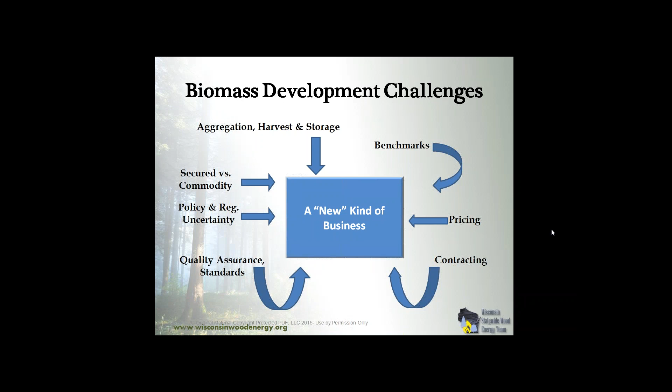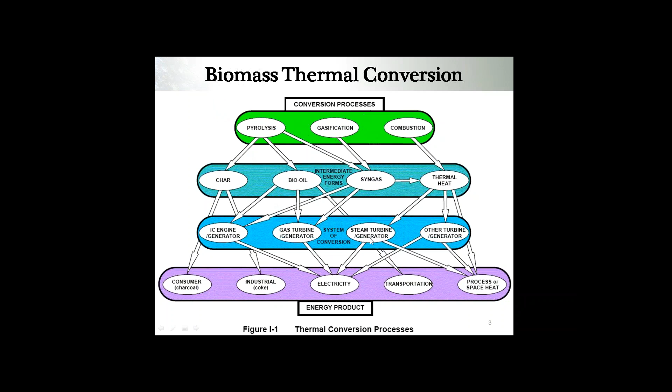The next series of slides are examples and exhibits on various types of conversion processes. For today's purposes, although I'll talk about some of these others, what we're really going to focus on is the steam turbine generator for the production of electricity and process and space heat. There are many other types of applications, but for today's purposes we're going to focus on those platforms.

It's not too much of a stretch to see some of the rationale for doing so. The thermal efficiency, when you do a combined heat and power plant, can be boosted anywhere between 20% to almost 40%.

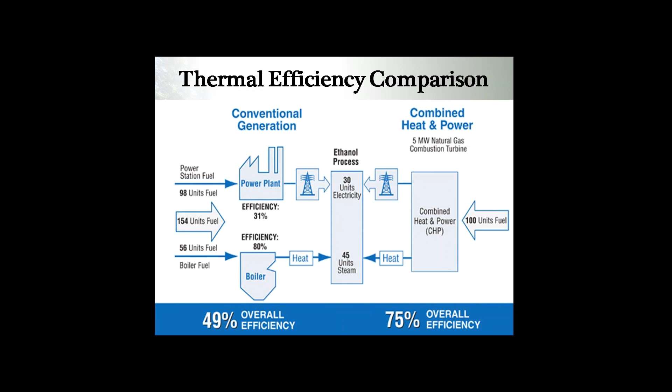The more common CHP systems are boiler-based, though there are emerging turbine-based systems. But in the United States, and particularly in the Wisconsin setting, almost all of our systems are boiler-based.

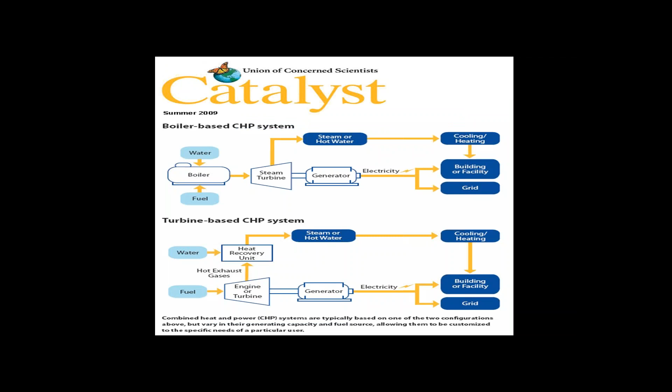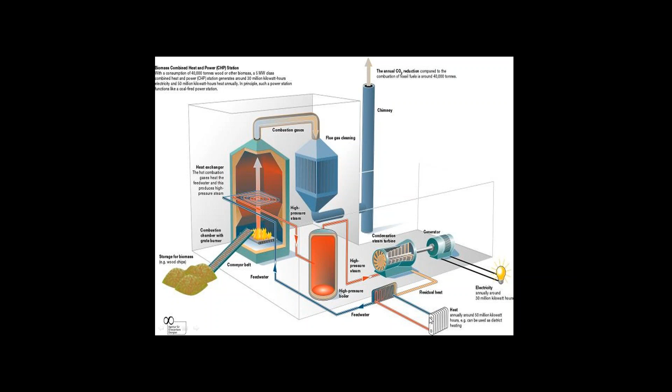These systems are not rocket science in terms of degree of complexity. You've got a fuel source, combustion chamber, flue gas cleaning. Often there's a secondary combustion chamber, boiler, and a turbine. It's a very standard approach to any kind of solid fuel-based electrical generation. The real key is in the thermal recovery of these systems, as exhibited by the heat register here.

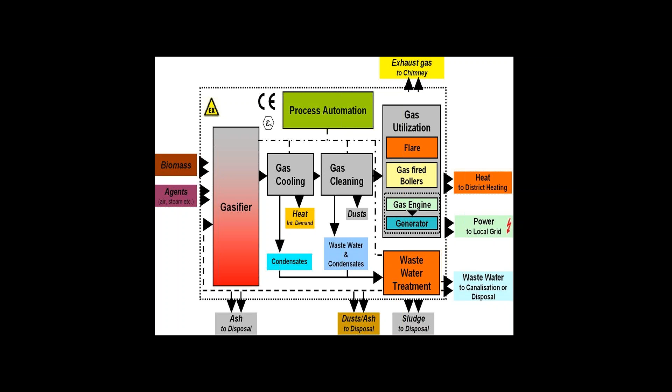Gasification, compared to a combustion boiler system, is typically more robust in that you can use various types of biomass feedstock and fuels, but it can also be a platform for doing something more than just heat and power. There are emerging platforms in gasification being looked at by increasing numbers of audiences for production of things besides power and process heat—in particular, pyrolysis and gasification systems for producing chemicals and fuels.

One other area of interest for large-scale systems is combining biomass or solid fuels with biogas. These are being investigated primarily by public sector institutions with large and predictable thermal loads. One benefit of combining these two fuel types is that biogas tends to be a consistent fuel the boiler likes to see day in and day out, whereas biomass can have a high degree of variability in fuel quality.

One day the fuel may be C&D debris with very little moisture content and very low ash, and the next day it may be forestry residuals with high moisture and high ash content. By blending in biogas, the boiler system gains flexibility—the biogas helps make up for the problems in the solid fuels.

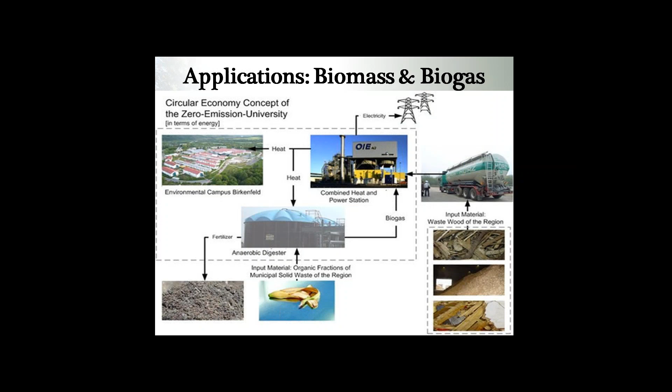I throw this slide in because this is what happens when you get a bunch of academics and agency people together in a room—they can create some rather elegant applications.

I don't mean to poo-poo this, but in terms of project financing and development in this space, today we're going to cover a pretty simple platform: combined heat and power. That said, interest in Europe, Asia, and the United States in this kind of systems-thinking, using biomass as the principal feedstock, is beginning to take hold, with projects in Brazil, Southeast Asia, and Europe adopting this approach to squeeze the most value out of a technology platform as possible.

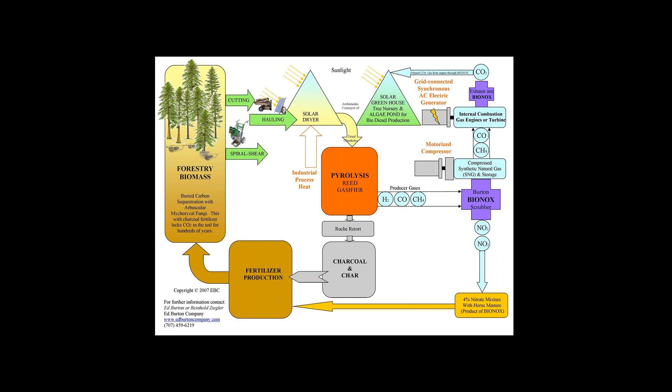In Wisconsin, Xcel's Bayfront facility is the longest operating biomass facility in the state.

It's a 73 megawatt steam turbine plant. Used to be a coal combustion system, but in the most recent years it's primarily burning biomass. The biomass is secured, purchased from a number of different logging organizations in and around the Ashland area.

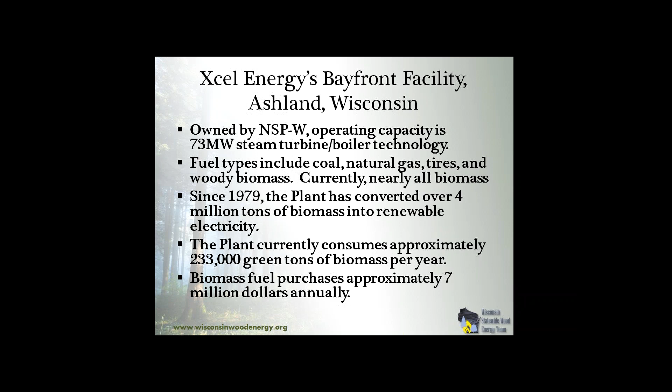It purchases north of 233,000 green tons of biomass a year, but that won't necessarily just be forestry residuals, it'll also be C&D. Xcel has a long history of purchasing in this area, and ironically, all the purchasing is handled out of their Denver office, but is delivered locally.

Domtar, on the other hand, and the We Energy facility in Rothschild is the newest large-scale biomass facility in Wisconsin. It is a CHP, thermal offtake, goes for process heat, mostly in the way of steam, to the Domtar paper mill, and then We Energy puts the balance, so what's available after that, on the grid.

It began operations in 2013. It's a 50 megawatt cogeneration plant. CapEx was almost $270 million, and it consumes about 500,000 tons of wood and paper processing residuals a year.

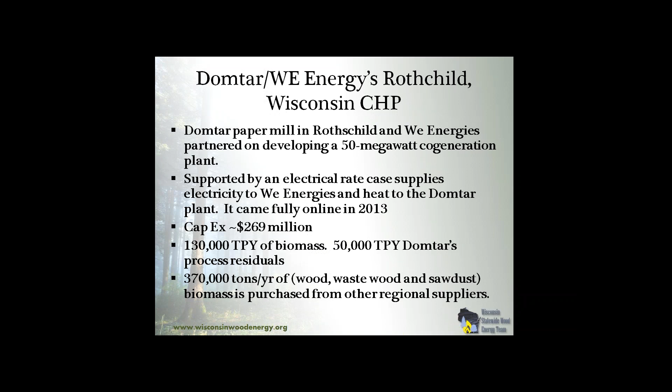Stoneman is a retrofitted plant. It's owned by DTE. It's located in Cassville, Wisconsin, which is on the Mississippi, not too far from Dubuque, just north of Dubuque. It used to be a coal facility. DTE cut out the bottom of the boiler and put in a fluidized bed.

It's a 40 megawatt plant, sells all the power to Dairyland through a PPA, and consumes approximately 300,000 bone-dry tons per year. Now that number will vary because there's a fair amount of railroad ties and C&D fuel, but DTE also contracts with foresters in and around the southwestern Wisconsin region for its biomass fuel.

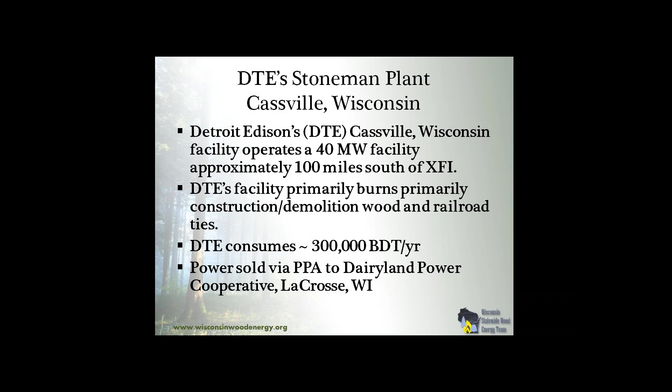All right, we're going to shift gears and talk about process, about building a business for biomass CHP. I'm going to throw a lot of information at you, but I wanted to give you an appreciation and an overview of what's all involved in building a business around a power plant, of varying sizes. The examples I'll use today will range from as large as 50 down to 15 megawatts.

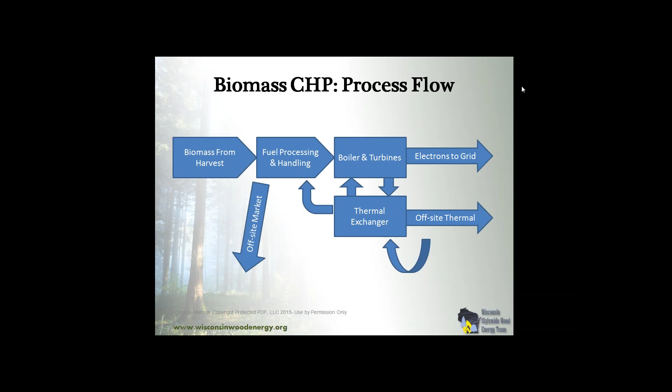It's a pretty standard process flow. Biomass from harvest goes through fuel processing. If there's an off-site market for the fuel processing, great, it goes for the boilers and turbines, electrons to the grid, and there's a thermal exchange. Let's look at this first sector.

Biomass fuel and the supply chain is by far and away the aspect of any biomass power or biomass heat project that has the most amount of risk, and as such needs to be almost bulletproof in its development. Every biomass fuel supply will reflect the regional characteristics. It will reflect what's available versus what's potential, and those are two different numbers. What the opportunity costs are for the players, whether there is an opportunity to provide fuel to a facility, where does it go to bedding, where does it go to mulch, etc.

There are the collection, harvest, and storage. Transport is the guts of the supply chain. Environmental and sustainability issues are always of everybody's concern, because if you think of it in these terms, if you are entering into a supply agreement with a facility that's expected to last 10, 20, 30 years, that supply chain has to match the demand presented by the power plant. So exploiting a biomass shed in the short term, leaving you exposed in the long term, isn't necessarily the best strategy.

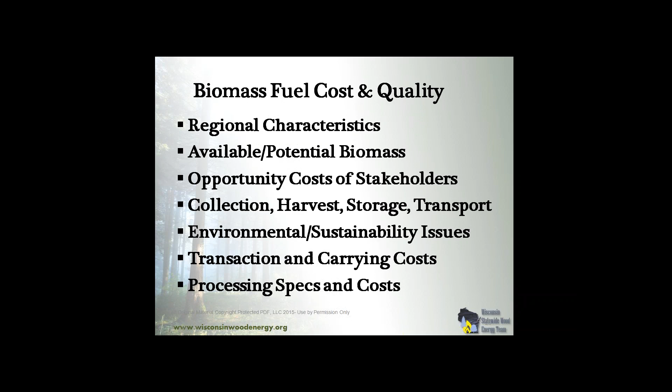Transaction and carrying costs for the inventory have to be built into this, as well as the processing specs and the costs to the converter themselves.

There are many different functions and roles in the supply chain: the broker, the dealer, or the person who puts the deal together, whether that be strictly a buy or actually a project developer; the producer of the biomass themselves, the harvester, the collector, those who transport, store, and take care of the logistics, who processes the fuel, and is there a business or financial service provider.

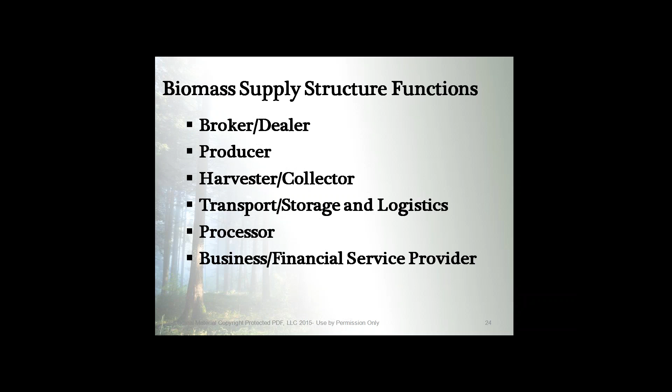In some cases, all of these functions can be provided by one or by a group of companies or participants in the supply chain that perform all these functions. In the case of Bayfront, that's pretty common, in that they're securing the stumpage, they're producing the wood, they're collecting it, they're transporting it, they're shipping it, and they're acting as the business agent.

Various types of supply structures exist. What is most common, and the examples I gave earlier, is vertical integration. What that means is that the converter, the power plant, actually owns and finances or operates a large degree of the supply chain.

In other cases, it's outsourced, where bids are solicited, and it's up to the producer, harvester, or collector to perform the functions in the supply chain. How it's managed, though, has historically been internal. That is, the power plant operator receives their supply delivered as is, and then bears the burden of dealing with the feedstock or blend internally with their own equipment and personnel.

What this system is competing against from fossil hydrocarbons is much more complicated, because with natural gas or coal, you place an order and expect that feedstock mix to be managed by the vendor or supplier. The vendor's paid by meeting specific characteristics of feedstock, whether it be Powder River Basin coal or natural gas, but it's expected there be consistent quality. We're not seeing that approach in the biomass space quite yet.

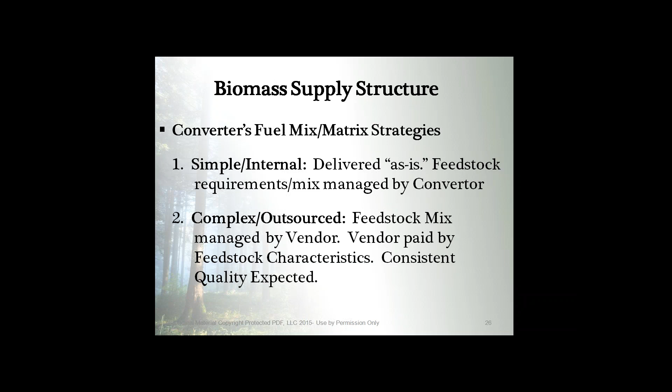There will be inroads as densification facilities play a larger role in feeding conversion platforms, where you can expect consistency. You can envision companies like Mark Wood Products and Indec and others starting to fulfill that role and then gaining the confidence of the converters that they're capable of doing so.

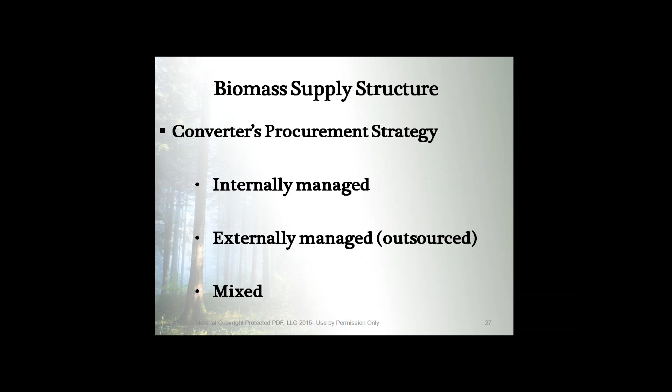Let's look at this a little better, because it's important to understand, if you're the supplier, how the converter thinks. In this case, when it's internally managed, the converter staff and systems are managing the fuel. This requires the converter to maintain a lot of staff.

For instance, in DTE's case, they were brokering over 1 billion tons of coal a year to various power plants, and that entire system was managed by 2 people. In their biomass supply, they've got maybe 4 or 5 plants, dealing with less than 1 million tons a year of biomass supply, but yet they had 6 people internally dealing with that.

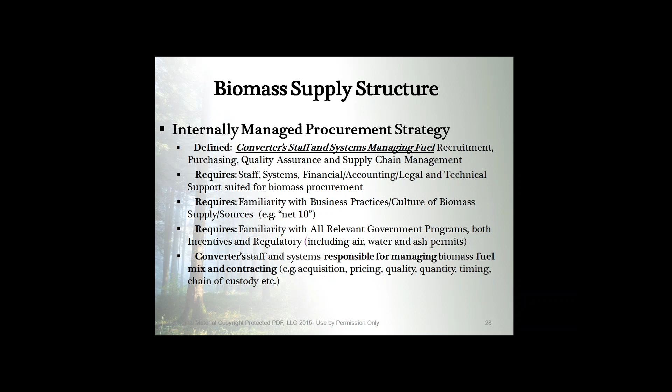It requires a commitment by the converter. If that commitment, that trust, can be extended outside, then the vendor is required to provide the staff and systems, but they're closer to the fuel itself and perhaps better suited to do so.

The defined fuel recruitment, everything is contracted outside of the firm. And then the converter staff, that is the power plant, are responsible primarily for managing the relationship with the biomass supplier. This is more in line with the coal situation. This is the ideal, so to speak, for biomass suppliers, but we're not quite there yet.

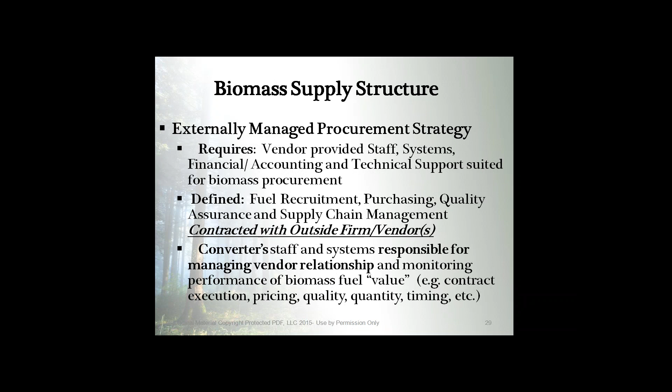I do see the pendulum starting to shift eventually. In those cases, you're going to start to see a mix, where a certain amount will still be dealt with by the converter, and then they'll start identifying players in their supply chain who they deem creditworthy and provide them more of an opportunity to provide turnkey services.

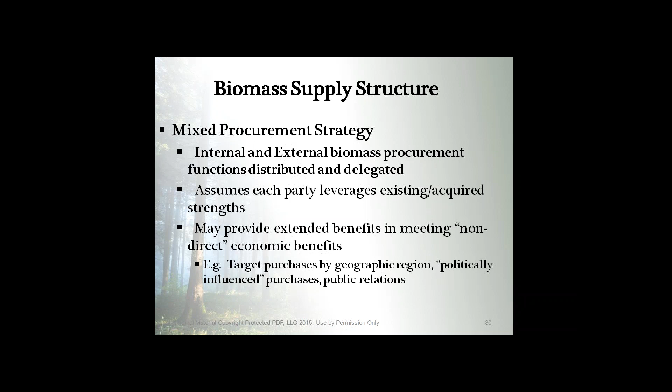All right, so let's go back to the basics of this supply chain. There's a land base, the producers and harvesters are involved, landing and shipping areas, on-site chipping and drying, densification, transportation, and finally it makes it to the market.

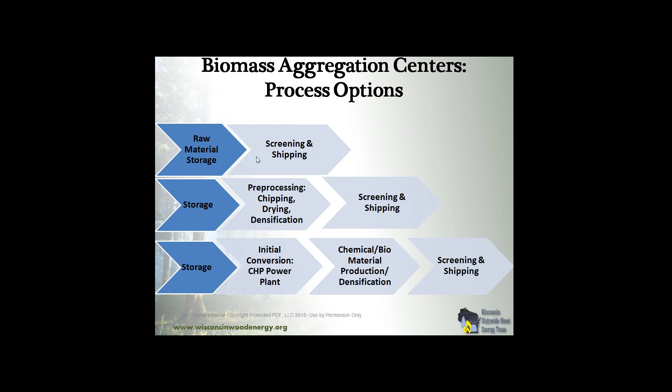There are, in some circumstances, and we've seen this especially in Scandinavia, multiple functions, such as on the bottom: there's the initial conversion to the power plant, biomass, biomaterial production, and shipping and screening, densification. This is more of the biorefinery process, whereas primarily what we're seeing in the United States yet is the raw material comes in, it's chipped, screened, shipped.

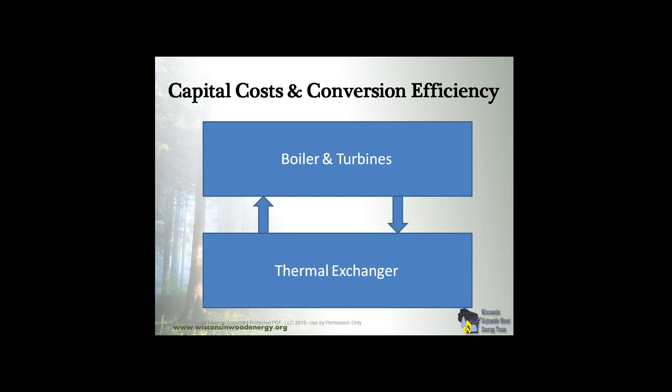Let's move into capital costs and conversion efficiency. The conversion technology is dependent upon the offtake. That is, the market drives the development of the project. You have to take a look at the needs of the customer, who the offtaker is going to be. If you are operating a CHP, you're looking at basically 2 different types of offtakes: power and thermal.

There are differences in capital costs between conventional boilers versus gasifiers, whether it's a dedicated facility or a co-fired facility, dedicated to 100% biomass, or will this biomass be burned with coal? Key drivers are capital costs per the installed capacity and capital cost for the hot water or steam capacity.

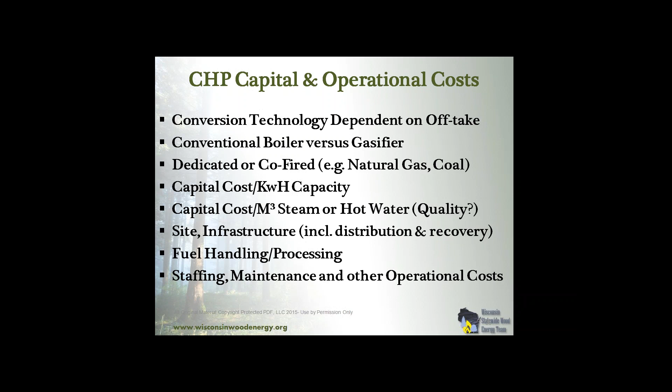What are the site or infrastructure costs? Fuel handling and processing costs, staffing and maintenance. General rule of thumb on fuel handling: the more robust, the more diverse your feedstock, the higher the capital cost for fuel handling, and there may also be higher capital costs for the boiler system itself.

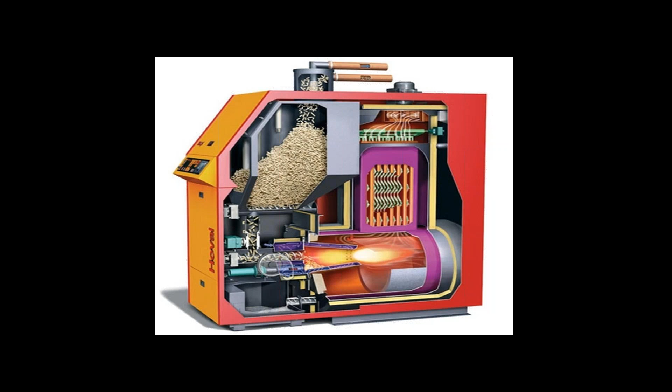For densified fuel, this is a compact boiler - fairly simple system, top feed, combustion chamber, rock and roll. Hoval is a vendor of these types of systems. I just pulled it because it was available in the public domain, but there are numerous types of vendors for these smaller boiler systems.

What impacts capital costs? The availability of credit enhancements, loan guarantees in particular, dramatically impact capital costs for projects. If your state, region, or country offers credit enhancements in terms of loan guarantees, it is almost imperative, given that we're competing with fairly low fossil fuel prices, that these be integrated into the funding of your project.

Same holds true with tax credits. Up until the end of 2010 was when the 30% credit expired, but back then IRS rule 1603 was probably the biggest jump-starter, steroid this industry has ever seen.

What is the debt and equity underwriting criteria? What's the creditworthiness behind the project sponsor? This will also influence capital costs, because the creditworthiness of the sponsor and the financial viability of the project will to a large degree determine what senior debt financing will look like in terms of the tenor and the rates.

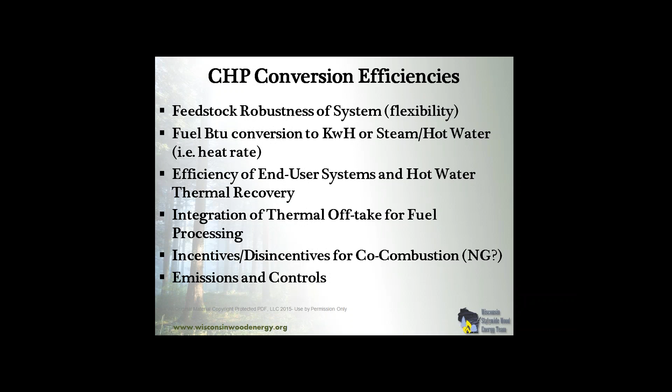So let's spend a little time looking at the revenue. In the finance world, we call this the top line analysis - it's the top line on your income statement.

An offtake agreement will have an amount and a price, and lots of other language, but basically that's what volume or how much stuff are you providing and at what price. The price, in some cases, is a published tariff - a buyback rate by a local utility, a buyback rate by a government - and it's known to all bidders, and you have to compete for that buyback rate.

In many cases, it's negotiated. Since Wisconsin is a regulated environment, we're almost always negotiating that with the utility. In some cases, the utility may have marketed or pre-sold the capacity of your project, and those negotiations were with the end user. Is this a base load project?

In most cases, it will be, and as a result, you should be expecting a capacity payment for that base load, which means that you're getting a fixed payment each and every month that you have this boiler system, these turbines, and this power available for the grid.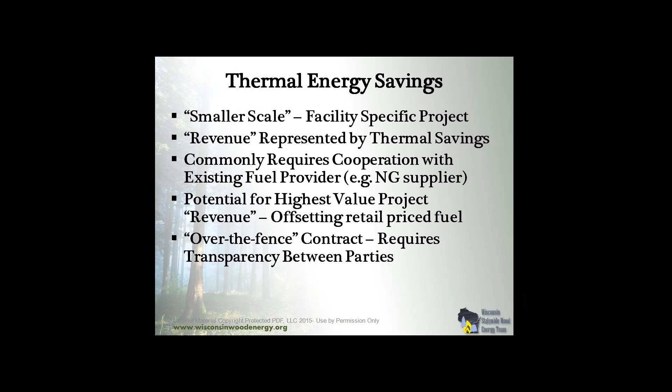Again, as with power, smaller scale, it's cost savings. And in most cases, with thermal offtakes, you are providing up to 100%, not quite. Especially in a northern environment like this, and when you have multiple off-takers, or you have an off-taker whose process, such as paper making or food processing, is highly variable, or the owner of the facility is not willing to transfer this responsibility to process heat back to you as the CHP operator. In these cases, they're going to take steam or hot water at a certain grade and then up the pressure, down the pressure, up the heat, down the heat to meet their specific terms.

And let's spend some time on riskiness. Every project, especially projects of magnitude, have certain risks. In biomass power systems, there's technology risk, operational risk, supply risk as we talked about earlier, market risk that the buyer may go away, price or competitive risk, and contractual risk.

Let's peel these onions back a bit. In addition to that, ownership structure, policy risks, regulatory risks, funding risks, and have you picked the right business model?

The example that's on the screen is drawn from a large-scale biopower, utility scale.

Every boiler is rated at a certain capacity, and most public utility commissions will issue licensing at a certain capacity. Most vendors of boilers will support or provide performance guarantees at a certain capacity. If there's a fuel switch from coal to biomass, understanding whether or not that boiler will be derated because of the variable or changing quality of fuels is really important. As is the internal employee risk of moving from a feedstock with a predictable long-term price you can get from Wyoming or Southern Illinois, to now going to local markets, which presents a certain degree of price and supply risk you don't have in fossil fuels.

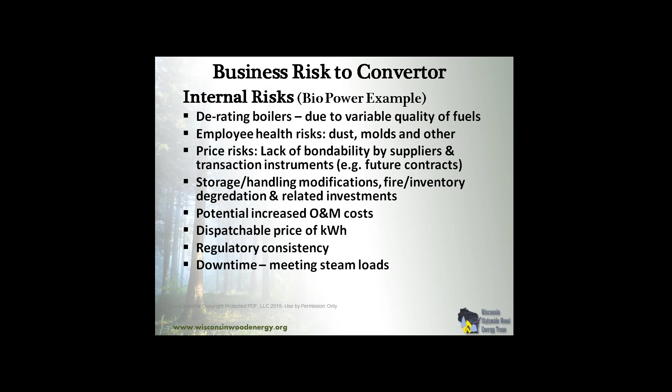For the sake of time, I'm going to move on. External risks include lack of infrastructure guaranteeing delivery, and lack of infrastructure for long-term production. For instance, what happens if a tornado or series of tornadoes go through a region and knock down 20%, 30% of the trees. Other risks include capital costs, quality control issues, and competition for biomass, such as a resurgence of the housing industry, and what happens to the price of biomass.

And lastly, the regulatory or environmental oversight. There's been a lot of progress on how biomass is treated as a renewable fuel, especially over the last couple of years. EPA is starting to come up with what appears to be a firm set of long-standing rules, hopefully, but we're not quite there yet.

Contractual issues involved in this supply or this value proposition.

Biomass supply, as in the Bayfront example - the value proposition to the loggers that Bayfront presented was it gave them a second or third market. The previous two markets were pulp and building materials. It gave them an additional market for utilization of their logging operations and available lands. The value proposition for them was that as long as they showed up on a regular schedule with a predictable amount, they had a very credit-worthy off-taker who would pay them on a regular schedule for what they delivered.

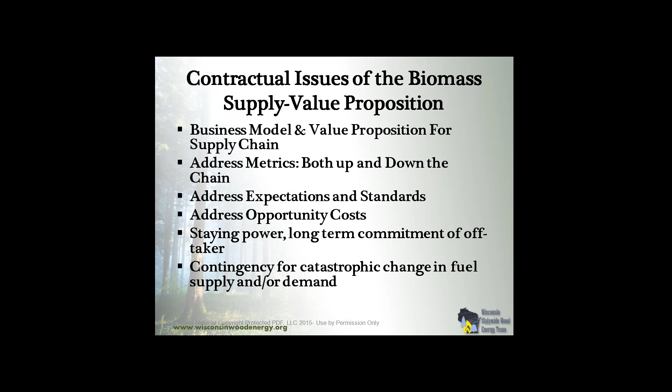The burden upon them was to address the metrics: Does it make sense for me to bring my residuals or forest crops in? Should I go out and find C and D materials, etc.? Have I thought this thing through? The reality, and the Bayfront case was a very good study in this, is that sometimes, the majority of the time, the biomass suppliers made money. Other times they didn't, but they maintained the relationship and continued delivering product in the short term, just so they could keep the contracts and relationship with Xcel.

Contracting risk is probably one of the biggest concerns in the biomass space. We're competing against natural gas and coal, where you can get long-term contracts. Or you can buy wind power or solar power and get fixed prices for 20 years. If we're going to go the biomass route, we've got to understand what we're dealing with, understand who we're competing with, and then set up a system of pricing that makes sense.

In some cases, it's a certain price point that we begin at - it may be $35 per bone-dry ton for the next six months. But as the biomass supplier and the converter gain trust and the relationship goes on, we tend to look at indexing - both against fossil fuels and against other price points such as pulp or building materials.

Environmental benefit sharing is not so much an issue now. It was more important in the recent past, and may be more important in the future. What does that mean? It means that if I, as the converter, own the power plant, and I'm getting a production tax credit or a renewable energy credit because I'm using biomass, or let's say in the future there's a carbon tax or carbon offset credit...

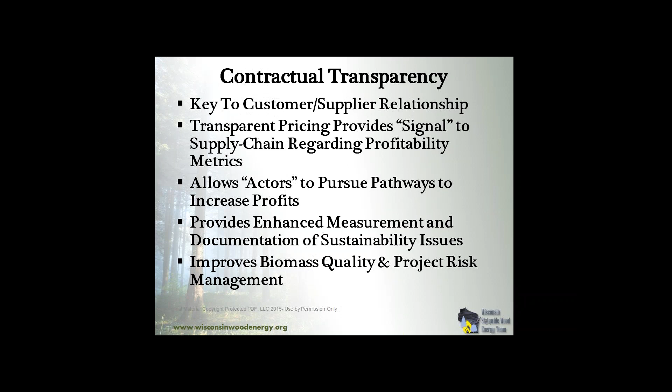Okay, I'm going to skip through. We've got 10 minutes left here. This is basically a summary of the discussion up to this point. I want to spend the balance of the time examining a case study and talking about project finance.

Case study I've had the benefit of working with since 2011, on behalf of Procter & Gamble. It's in and around a paper mill that they own in Albany, Georgia. P&G had set up a rather ambitious internal renewable energy target of 30% by 2020.

In the Albany situation, they had existing biomass. They were already buying pulpwood. It's a kraft mill, and they were purchasing biomass for an existing boiler.

They had a standard internal hurdle rate of X%. This percent was a capital budget hurdle rate that applied to all capital projects, regardless of whether it was a renewable energy investment, a process improvement, or a marketing campaign. It's one standard rate that has to be met. If it's not met internally, the project doesn't happen.

That's an important hurdle because you'll see how it evolved in just a second.

There was a military base, a Marine Corps base, about 10 miles away that had an appetite for green power. Again, just like P&G, the Marine Corps had a set of conditions and standards, and one of those was that they weren't expecting to pay a premium for renewable energy, at least in the beginning term of the contract.

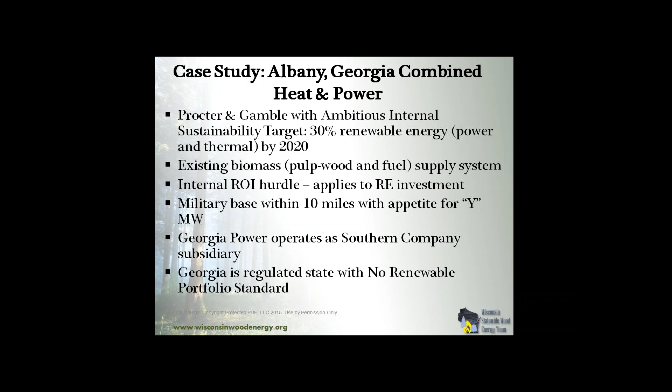This is what happened. P&G spent a lot of time, energy, and resources identifying key players, doing internal modeling, engineering, working with the Marine Corps, and then began the search for development partners.

What they ended up recruiting was a company called Sterling Energy Assets. Sterling was a division of a company that had made a fairly good business selling renewable energy credits throughout the nation, but this was their first real endeavor as a project developer.

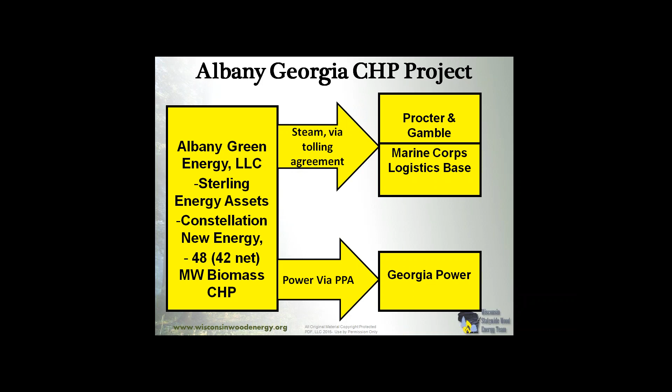Albany Green Energy was formed. Sterling was the catalyst, and Constellation, the Maryland-based utility, eventually came in to buy the project and was the owner of record. It's a 48-megawatt operation where the steam contract, the thermal offtake, goes via a tolling agreement to Procter & Gamble and the Marine Corps base, and the power PPA goes to Georgia Power.

Behind this is a rather innovative way of approaching things, in that it was financed to a large part by a guarantee from the Albany Payroll Development Authority.

This is an authority that was created through a new market tax credit program, in collaboration with the federal government, and took advantage of the substantial payroll of the federal, state, and local governments in and around the area to act essentially as a development bank. They are the economic entity that operates under the new market tax credit.

I don't want to get into the weeds here—frankly, the more I study it, the less I really know about it. But Procter & Gamble acted as the catalyst for making all of this happen. They really were the sponsor behind this, and they recruited the participants and other stakeholders. They also de-risked the biomass feedstock supply. They didn't go so far as to guarantee the supply, but they lent significant logistics support, operational support, and planning support.

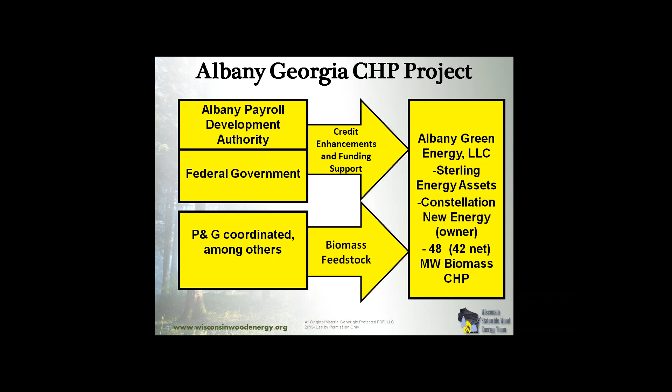The tolling agreements are 20 years in tenor. The PPA for power is sub 6 cents a kilowatt hour, or $60 a megawatt hour. What the real innovation is in this is that the PPA then has escalators. These escalators are indexed based upon producer price index, employment cost index in and around the region, the price of diesel, because diesel is a huge component in the cost of collecting the biomass, and a reflection of what's happening in the timber market. This escalator is applied on a regular review process and then impacts the price of power.

Steam is sold to Procter & Gamble, who then resells it to the Marine Corps logistics base. And as I mentioned earlier, there's a new market tax credit. Second case study, City of Fennimore.

This was the municipal example I talked about earlier. The catalyst behind this was the supplier, a company called Bioenergy Products. They had access to wood, dedicated energy crops and crop residuals. They entered into a joint development agreement with the City of Fennimore for CHP of 15 megawatts. UMMPA, the Upper Midwest Municipal Power Association, offered a PPA.

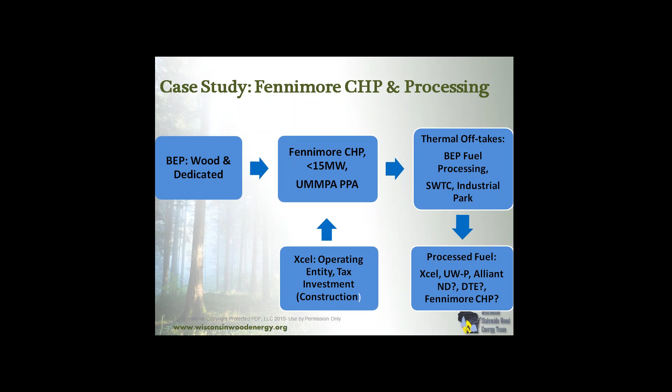All right, we're going to wrap up by looking at the basic structure of project finance. Projects of this scale, even small-scale projects such as Fennimore, are still going to have price tags in the $60 to $70 million range when you factor everything in. When you look at a project like the Procter & Gamble one, we're probably talking $170 million projects. These are big projects.